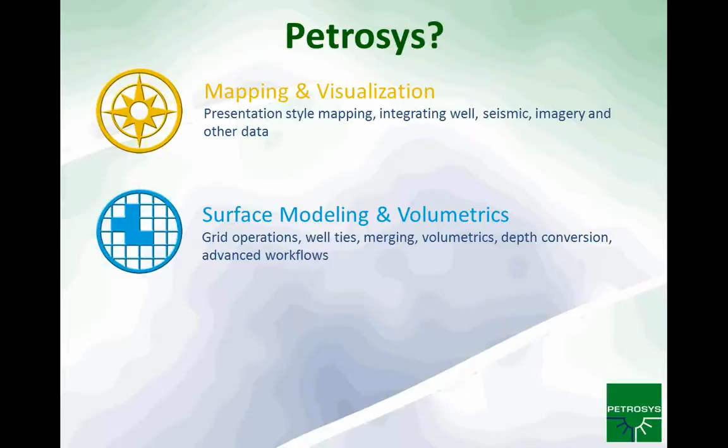I will finish the webinar with a 3D visualization to help bring things together. I'll demonstrate our surface modeling and volumetrics module by creating a grid and contours from 2D seismic, as well as performing some grid arithmetic.

Throughout the webinar, I'll showcase our Direct Connect technology, which is the ability to link to third-party data stores and display spatially aware data on your Petrosys maps.

So without further ado, I'm going to jump into Petrosys.

The first thing that I'm presented with here, let's just minimize some objects on my desktop. The first thing that I'm presented with here is the main Petrosys menu. The thing I'm going to focus on now is the project selector.

So the first thing I need to do before I launch Petrosys is select an appropriate project. I've got a list of projects here that I've already been working on, but for the purpose of this webinar, I'd like to create a new project.

If I had some projects that already exist on my local machine or over the network, I can add those or copy those into my project list. So I'm going to go ahead and create a new project.

Now at my site here, I've already got a project template. So I can select that project template which incorporates things like map sheets and other information that I just want to copy across to my new project.

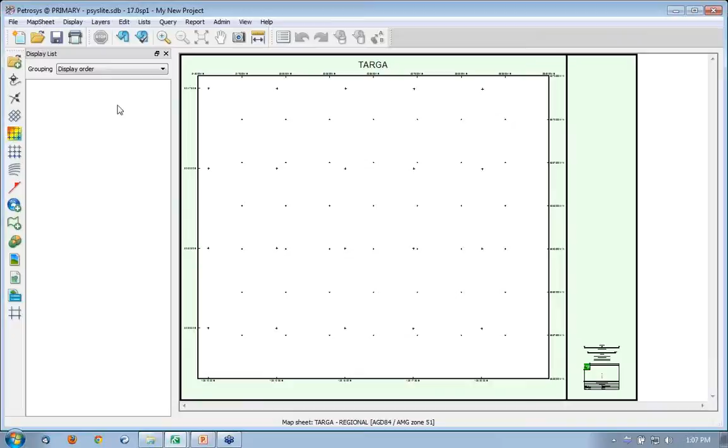So now that I've got my map sheet, or the bounding box where I'd like to display some data, the first thing we may wish to display is some 2D seismic. So I'm going to click the Display 2D Seismic icon.

Now from here I can specify where I would like that 2D seismic to come from. I can connect to my OpenWorks project, Petrel, Seisworks projects, and pull through that 2D seismic and use it in my map sheet. I'm going to specify SMT Kingdom, connect to my Kingdom project, and make sure the CRS of my project is set accordingly so that when I display this data it knows where it is in space, and click OK.

I'm going to leave my line style as is and display the line name. I'm also going to tick on Display Interpretation Data and pick a horizon that exists in my SMT Kingdom project. I also have the ability to display seismic data.

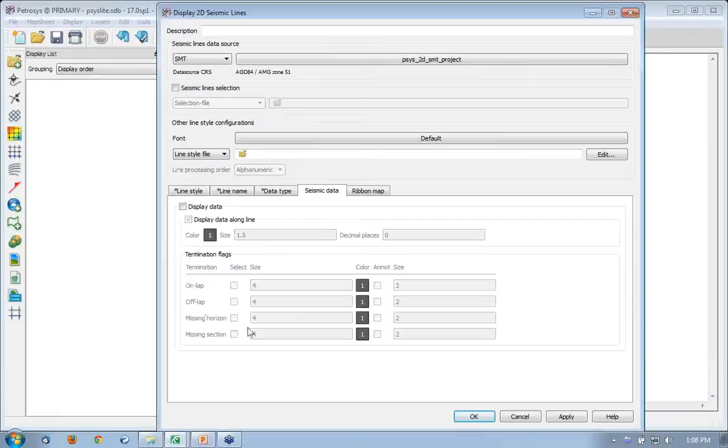Now if I come to the Ribbon Map tab, seismic horizon data can be displayed directly from third-party packages, in this case our Kingdom project, and we can use a number of visualization techniques to display that data. I'm just going to tick on Ribbon Map and click OK to accept the defaults, and you'll see that I'm displaying my 2D seismic with interpretation directly from Kingdom.

Now my maps in Petrosys are fully interactive. If I click on a 2D seismic line I can drag through and you'll see the bottom information bar gives me some information pertaining to that seismic line.

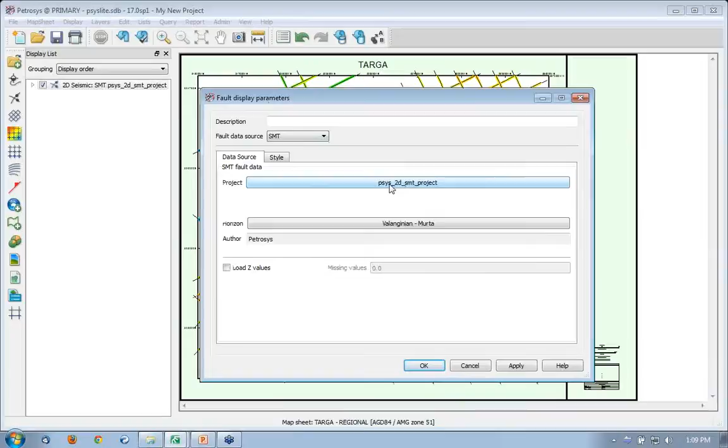You can directly display faults from your third-party interpretation projects, which includes support for displaying faults from Seisworks. This is where I would specify my fault data source. I'm going to display from the same Kingdom project, select this horizon, and click OK, and I display my faults from SMT Kingdom.

I want to display some spatial or cultural GIS data on this map. So I click on the GIS icon. From the drop-down, I can specify spatial data from Oracle Spatial, from Petrel, from Petrosys file types, a MapInfo file. In this instance, I'm going to select the shapefile, and the shapefile I'm going to select is my Targa block boundaries.

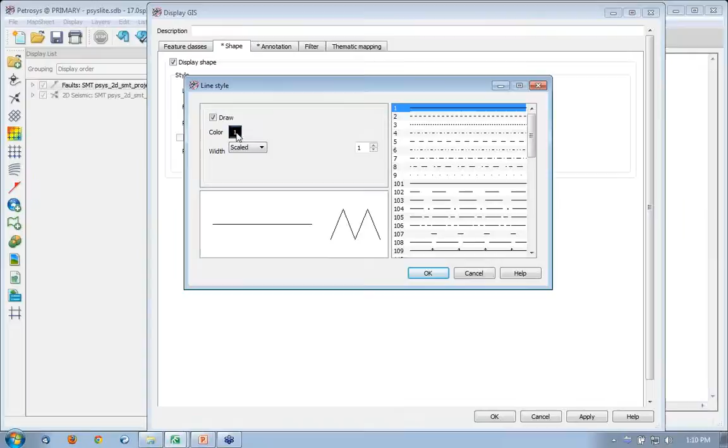I'm just going to go to the Shape tab and change the line style associated with this shapefile. Let's make it a little thicker as well, and click OK. I can also annotate, filter, and thematically map spatial data, and I click OK to display my block boundaries from a shapefile.

I may now wish to display some well data on my map. Again, from the data source drop-down, I can display wells directly from Geoframe, OpenWorks, Petrel, etc. I'm going to specify our SMT Kingdom project.

Under the Well Symbology tab, I can display symbols for the surface, the bottom hole, for a particular zone or formation. If I specify current, what that does is pull the symbology down from my Kingdom project and display that correct symbology in Petrosys.

I can annotate my wells. I'm going to annotate at the bottom hole. I'm going to tick on an SQL query, and query my Kingdom data to display the well name at the bottom of the hole. I'm just going to change the color and change the size of my annotation.

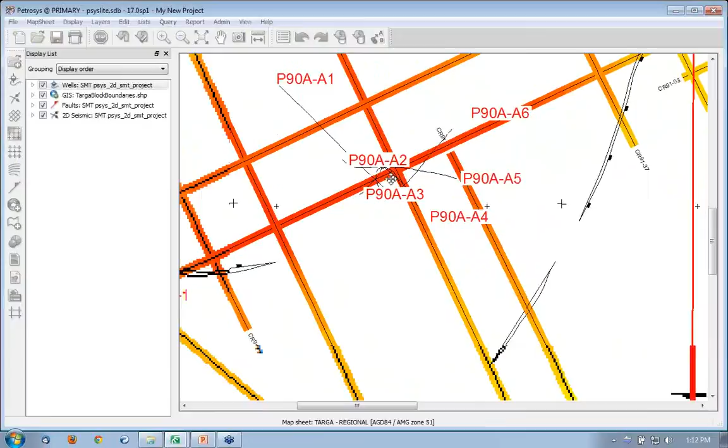At this stage I can use my mouse wheel to zoom into my map. I can hold down my mouse wheel and pan around my map. So I've got mouse shortcuts that I can use to view that information that's pertinent to me.

I also have the ability to tidy up the annotation using overpost correct in Petrosys. Let's move that window down here. And that gives me the ability to pull my text apart and put it exactly where I want it to be on my map, so I can really produce a nice, tidy, professional quality looking map here. I click OK, and that movement, that overpost correcting, has saved itself on my map.

When I save my map, that correction that I've made is honored, so that when I reopen my map, all those movements will still be in place.

Now it's a good point to tell you about Petrosys maps. The maps that you save in Petrosys are dynamic. I've made several connections now to my SMT Kingdom project. If I were to save this map, then close down Petrosys, do some interpretation in Kingdom, and reopen this map perhaps in 6 months' time, the changes that I've made in my interpretation project will come through on my map, or my map will represent that new interpreted or raw data. But of course we still have the ability to save static maps in Petrosys, and I'll show you that later.

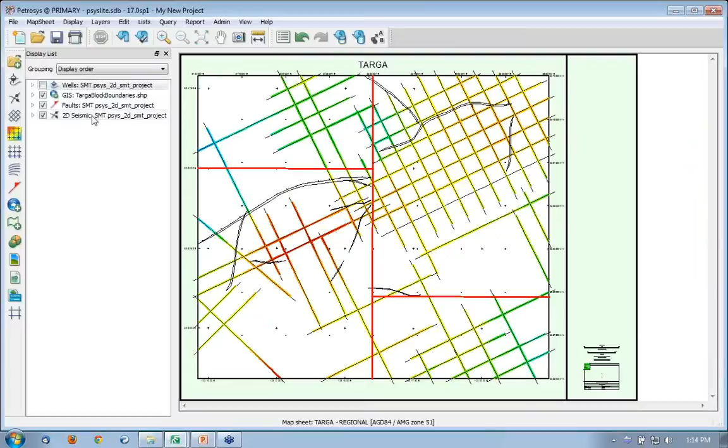So I'm just going to close that. I'm going to go back to my full extents. I'm just going to tick off my wells. I'm going to modify my seismic layer just to tick off the ribbon map.

And I'm going to save this map out, and I'm just going to call this my map. The extension DBM is appended automatically, and just click Save. And we'll come back to that map later.

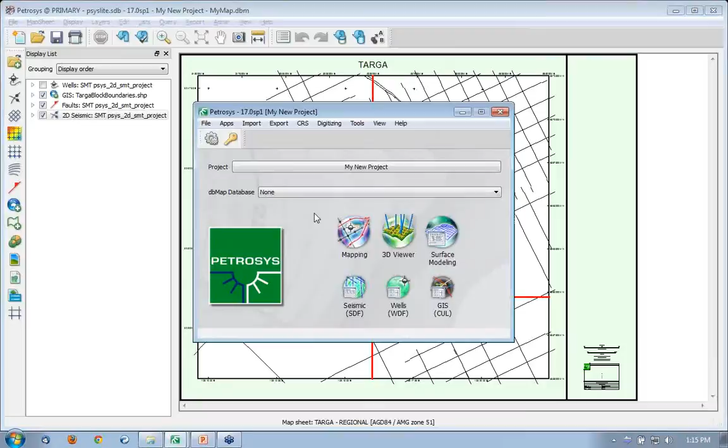At this point we may wish to produce a grid and some contours from your data. I'm going to jump back to the main Petrosys menu and launch Surface Modeling. You'll notice there's icons along the top which will help improve your access to those commonly used functions.

Now to create a grid, I'll go Grid, Create Grid. The output grid name, I'm just going to leave this as Top Valanginian.

I can specify the output CRS. At this point, I can click on the output CRS and pick any CRS that's contained within the EPSG database to use. But I'm just going to leave my default project-specific CRS. Now that I've defined those outputs, I specify some input data.

Most common data types can be used as input to gridding, including well data, seismic interpretation, spatial data, point data, contours, etc. Multiple data types can be combined from multiple data stores in multiple CRSs to produce a single output grid in Petrosys.

I've already got some data there. I'm just going to remove that from this list. And I want to add some seismic data.

Again, from the data source, I can pull data down from SeisWorks, from Petrel, from SeisWare, but I'm going to specify SMT Kingdom. I'm going to connect to our Kingdom project, making sure that my CRS, my coordinate reference system, is accurate. The horizon is my Valanginian Merta. My data type is time, and I'm going to use the 2D data that resides in that project.

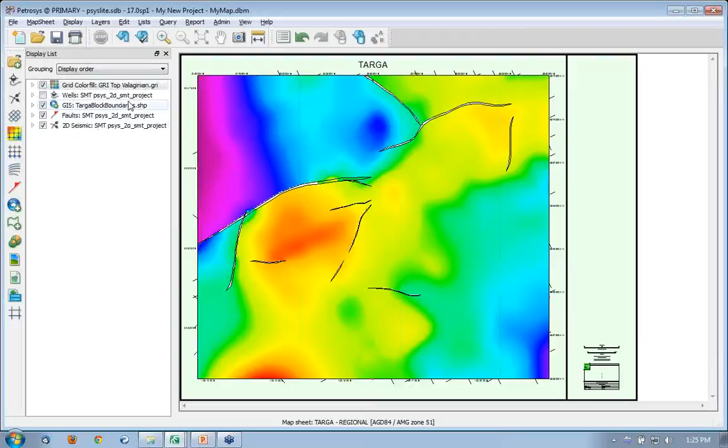So I'm just going to minimize my surface modeling and come back to my mapping. Now the grid that I've dragged and dropped onto my map is at the top of everything. If I go to my display list here, it shows me all the layers or objects that I've got displayed on my map. I can grab my grid and just drag that to the bottom, and it puts it beneath everything.

I can change the way that these objects or layers are grouped. I can view the grouping by CRS or coordinate reference system, by data source, so I can see all those objects that I'm displaying from my SMT Kingdom project, by layer type, whether things are seismic, grids, wells, etc., or by the display order. If I want to create my own group, I can create my own group here too, and I can bulk tick things on and tick things off when I've got my group.

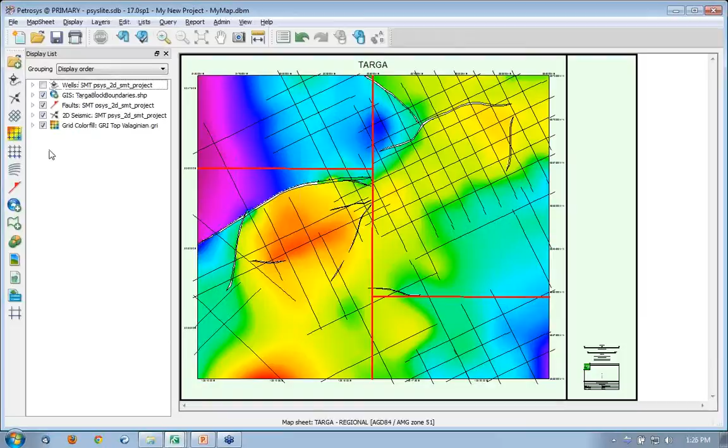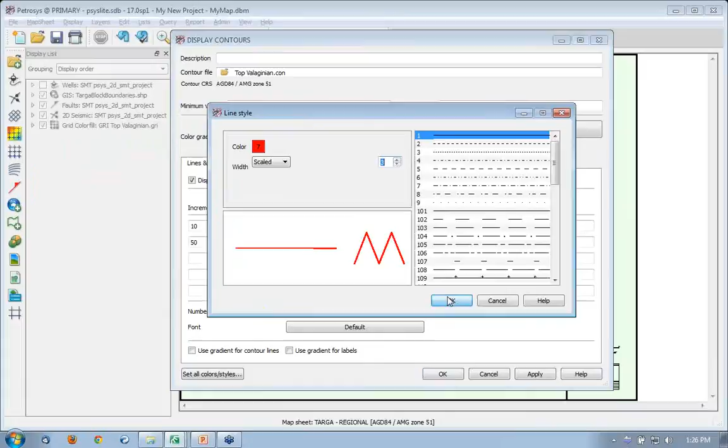We also computed some contours. So let's navigate to my top Valanginian contour and display at the increments that were computed. So I'll put in increments at 10 and at 50. I'm just going to change the style here for the 50th and just label those as well. Let's just change the size, make that a 5, and click OK.

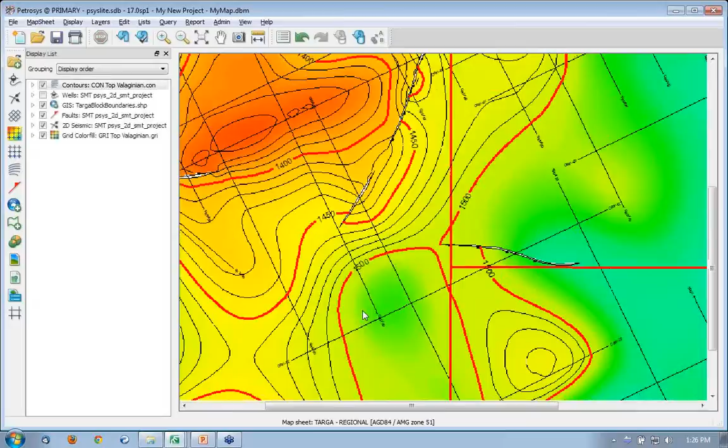And I display my contours from the gridding process in surface modeling. I can zoom in, of course, using my mouse wheel, and you'll see that I've got labeling parallel to my contours. I can also click on a contour, and you'll see that it gives me the area of that closed contour.

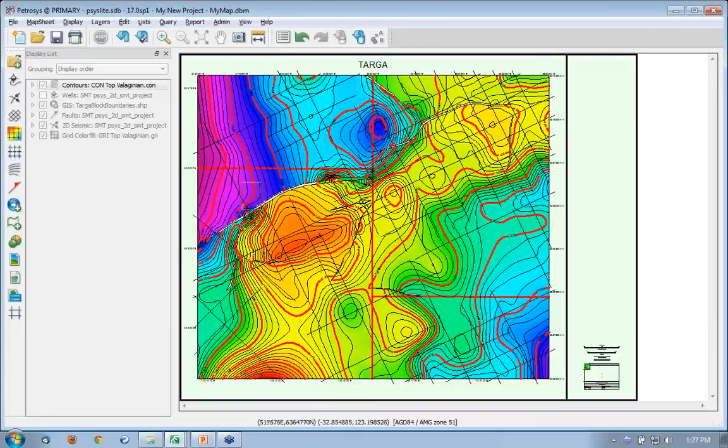If I just go back to the full extent of my map, I may want to create a new map sheet here. So I can go map sheet new, pick on map, easting northing. I give my map sheet a sensible name. Let's just call this prospect area and click OK, and it gives me some crosshairs so I can drag and cookie cut an area out of this map.

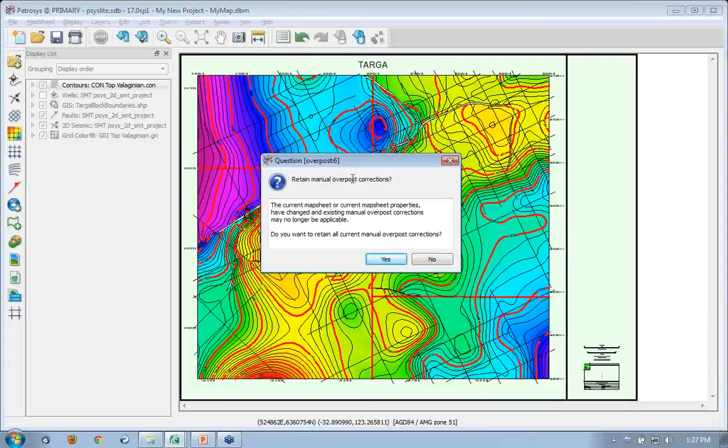I want to give it a sensible title. Let's call it prospect area. I will change the scale to 10,000 and just check the sheet size here to make sure that it's sensible for my plotter, and click OK. Yes, I want to retain those overpost corrections that I made for the well data, and it's quickly and easily created that map sheet.

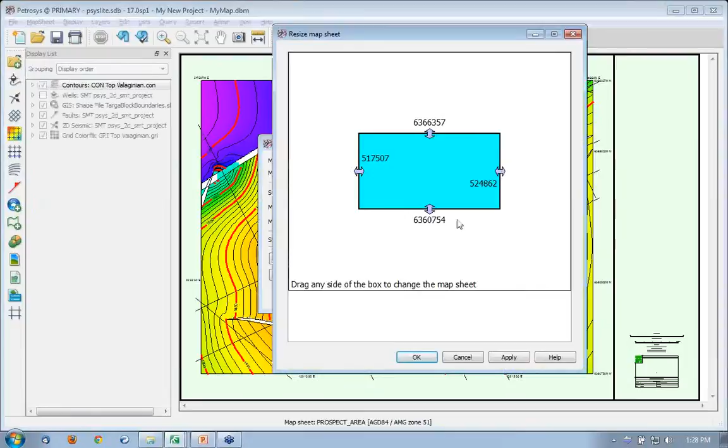So I've got a new map sheet, but you'll see that the objects or layers displayed stay the same. That's important in Petrosys - my display list and my map sheets are independent and interchangeable. I may have missed an area off my prospect area here. I can quickly grab that by going to map sheet edit, resize my map sheet, and pull that out in these two directions. I click OK, and very quickly it's resized my map sheet, but everything is still spatially aware - Petrosys still knows where everything is in space on that map.

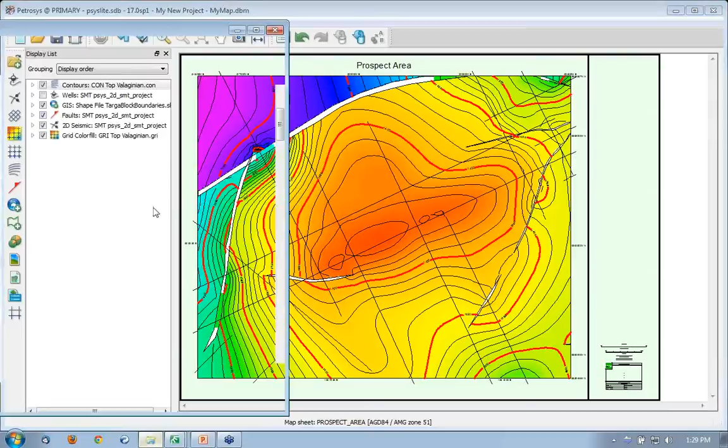Once I've got that, I may wish to use the print icon to print to a printer or plotter. But I can also export a static map, so I'm just going to export a PDF here and save that on my desktop. Just navigate back to Windows Explorer, go to my desktop. I've got the PDF we've just created here, and I'll open that - you'll see how quickly and easily I've created that static PDF of my map.

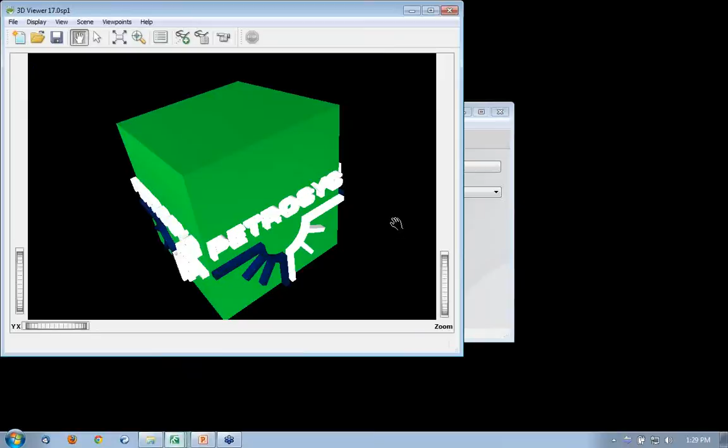So I'll just close that. I'm going to jump back to my main menu and just jump into the 3D viewer to finish off here. The Petrosys 3D viewer has a similar interface to 2D mapping. The 3D viewer complements 2D mapping - it allows you to QC your surfaces and grids and display wells and other spatially aware data.

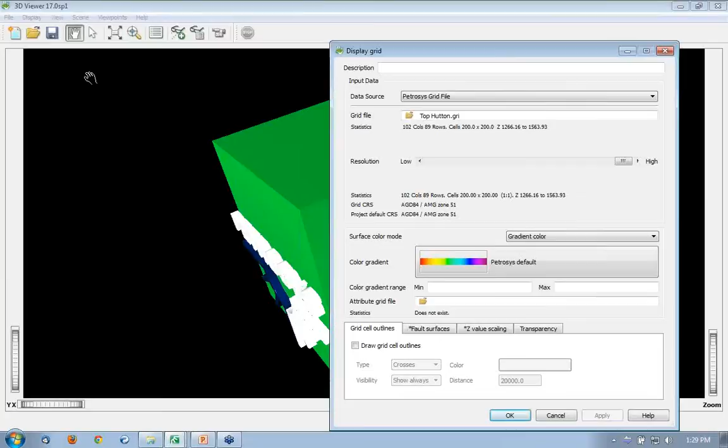So I'm just going to display a grid. I'm going to select my depth grid for the top Hutton. Just make sure that my Z-value scaling is correct. I click OK, and my grid has come through. I can use my mouse - just hold down the left mouse button and I can rotate around that view.

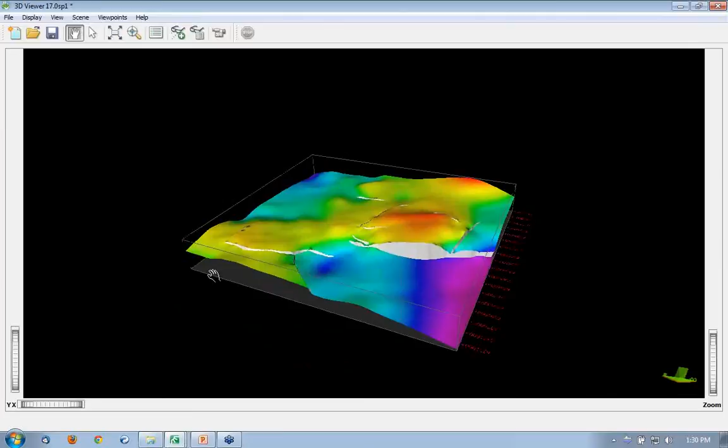I can also display wells, and I can again connect to a third-party data store here. I'm going to leave it as SMT Kingdom and connect to the same Kingdom project that we've been connecting to throughout the demo. I'm going to leave the symbols as they are. I can display well header information, and I can display well paths - I'm going to display well paths that are slightly thicker so that we can see those.

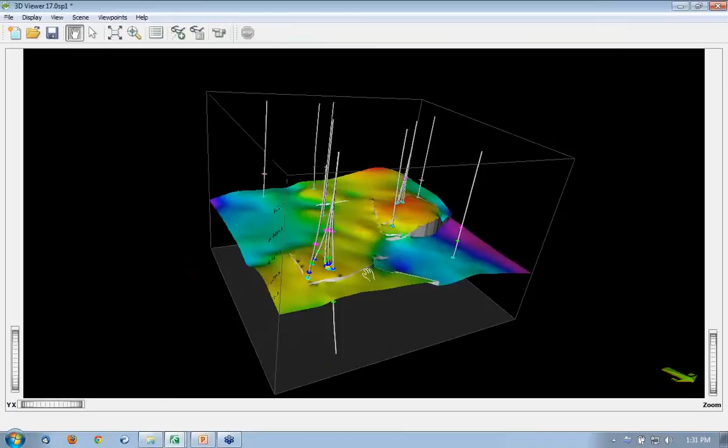I can also display formation tops, and I'm going to leave formation tops and put a size in at 100 and click OK. You'll see that my well data comes through with those formation tops. If I rotate this and use my mouse wheel to zoom in, I can jump to pick mode and select that formation top, and you'll see I get information pertaining to that top in the information bar again. This is essentially a live feed directly from my Kingdom project.

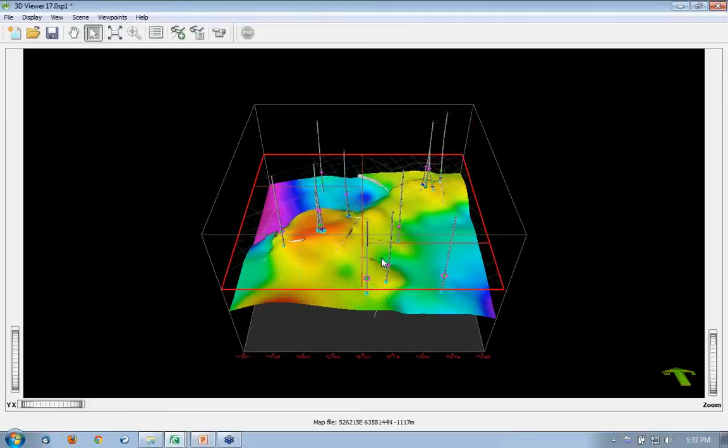I just go back to the default view, and I can also display a Petrosys map file in my 3D viewer. So I can pull through the map we created earlier and click OK, and you'll see, hopefully, that that has come through as a plane, and I can drag that through. Let me just try to zoom in here so we can see that data better. So you'll see I've got that spatial data - my block boundaries, my 2D navigation data - come through from the map into my 3D viewer.

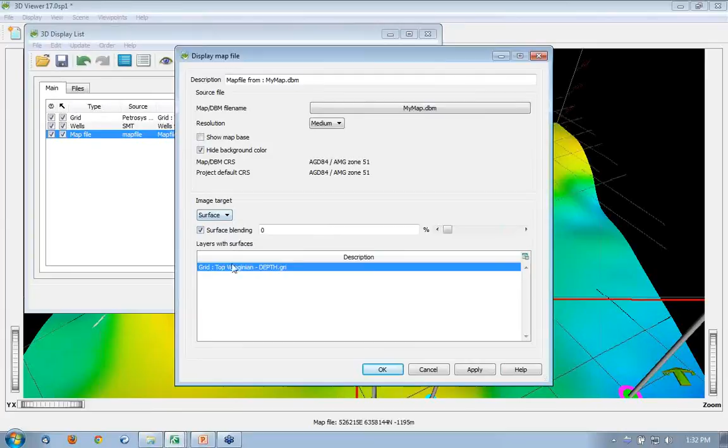I can modify that display. Let's just change that - I can drape that map over a surface that resides in the 3D viewer. Let's just click OK and close that. So you'll now see that spatial data is draped over that surface.

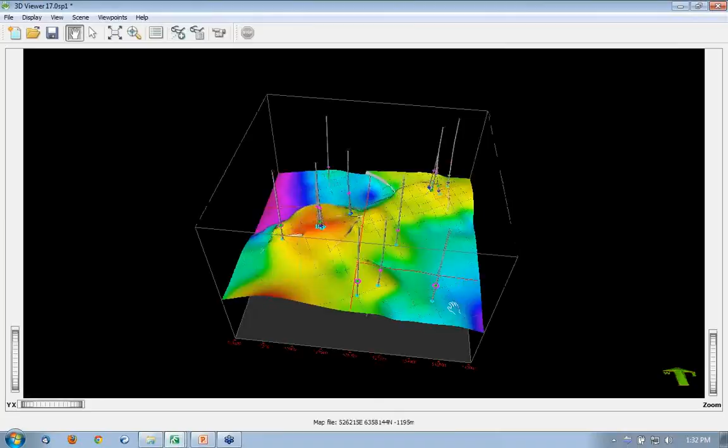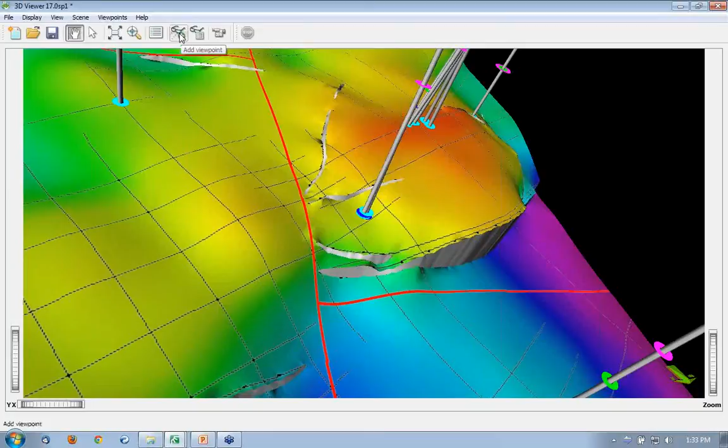If I go back to my default view, I can add viewpoints. I can rotate around, add a viewpoint. I can seek to areas or structures of interest in my 3D view and add a viewpoint. I can rotate around, add a viewpoint, seek to particular wells and structures and add a viewpoint. So we can zoom to particular areas, add viewpoints, and ultimately animate that selection and save this out as a movie.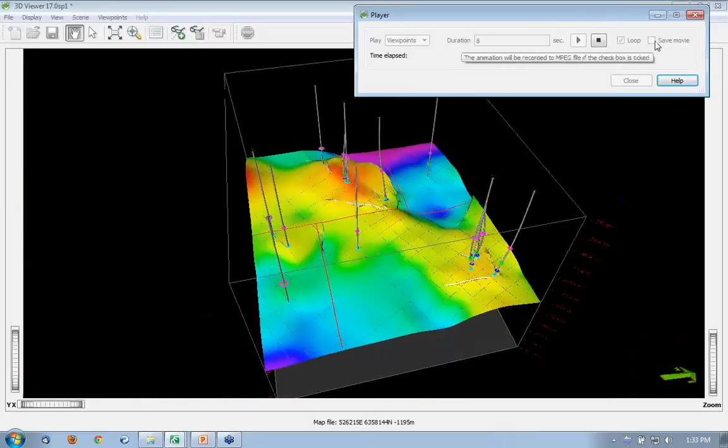So I'm just going to put the duration here at 8 seconds and click play, and you'll see that it interpolates between those viewpoints, and I've created that movie. As I said, if I want to, I can save that movie out as an MPEG, and I can embed that into presentations. So I'm just going to stop, close, minimize my 3D view, and just jump back to my PowerPoint.

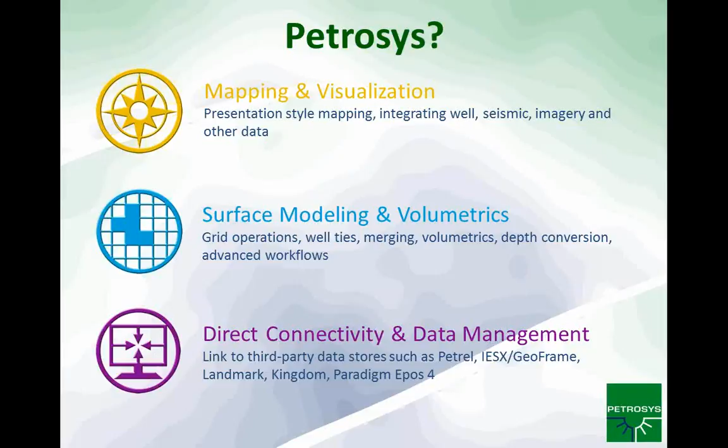So in the demo, you've had the opportunity to see Petrosys mapping. We've had a look at some surface modeling, created some surfaces in the 3D viewer, and we've also done some direct connects. We've connected to our Kingdom project and used that data in surface modeling, displaying that data in the 3D viewer and on our 2D maps. As well as Kingdom, we also support other third-party data stores - Paradigm EPOS 4, Petrel, Landmark products - as well as our own dbMap.